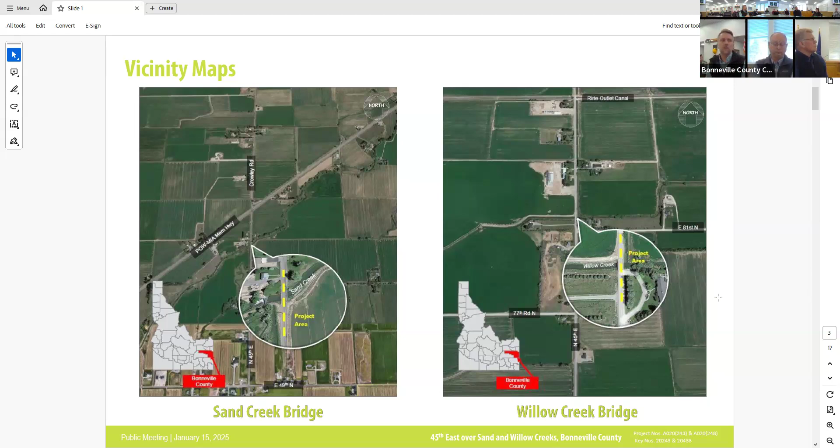The project is funded by federal aid, but our goal is to make improvements to the bridge. It's not a roadway project, it's not extending 2 miles of roadway improvements - it's strictly to replace the bridge. If we go to the next slide.

A little background on these two bridges, and I have some pictures that will follow this, on why they're being replaced or what the need for them is. Both of them have approached their service life. Sand Creek is a little older, built in '57. Willow Creek was built in '69.

Sand Creek - if you go there right now, there's no water. Well, I don't think there's water in it right now, but you can walk underneath the bridge and you can see the condition that it's in, and it's not in very good condition. Both bridges are posted, meaning they're weight restricted, and considering the area, that can affect farm equipment and other heavy traffic vehicles.

So the county identified this project, I don't know, 5 or 6 years ago, submitted an application to LHTAC for funding, received funding, and went out for proposal.

This federal aid process takes a lot longer than some of the other bridges we're working with on Little B, which will have 5 or 6 bridges. Little B is the new commissioners' Leading Idaho Local Bridges program, funded by the governor 3 years ago. We were able to apply for a number of bridges in the first round of funding, and they came out with a new round that we just applied for, the maximum number of bridges, which was 2. We haven't heard back on that yet. That's separate from the funding for these bridges. If you have an expectation that process goes as fast as that, it doesn't - with federal aid it's a much longer process. We'll talk a little about timelines, but it does take a while to go through everything.

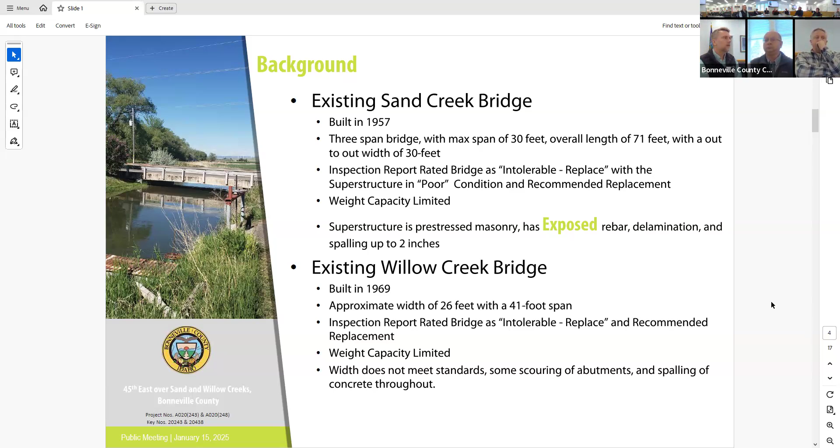If you go to the next slide, you'll see pictures of the underneath side of the bridge. You'll see cracking longitudinally - those are actually masonry blocks, which is a unique style of bridge. You don't see that very often, but it's masonry blocks placed together and then post-tensioned, with tensioning strands in there that tighten it up to keep that together. So there are cracks, you're seeing efflorescence, which is moisture coming through the blocks, and you're seeing the piles being eroded. So it's not only load posted, but it is in need of replacement before something continues to get worse.

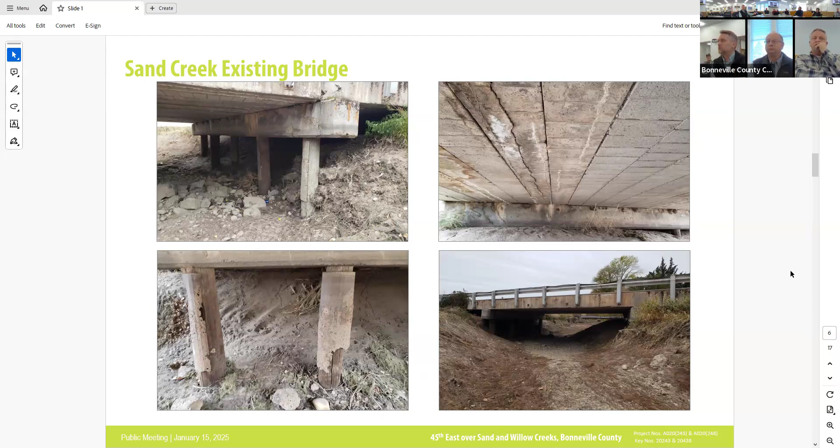So that's Sandcreek. Willow Creek is a steel bridge - the girders are in a little better condition, but it is still load posted, and there is some scouring effect as that water runs pretty much year round.

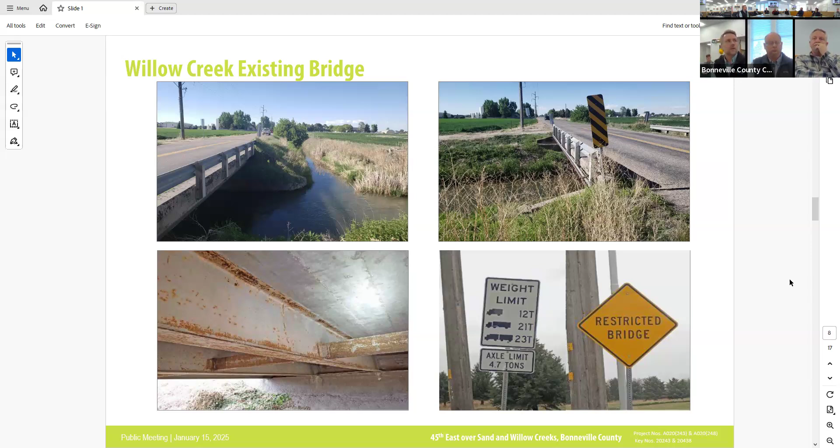So we already talked a little about the objective and some of the elements, but the objective is mainly to replace these structures with new, wider, longer structures that improve safety for vehicular and pedestrian traffic.

Project elements: both bridges will be new. There will be realignment - I'll show a little of the preliminary plans here - but that Farmers Canal adjacent to the road ties into Willow Creek, and we're going to have to realign that a little to get a wider road and wider bridge. We've had preliminary discussions with the property owner as well as the irrigation district, and as we continue forward in design we'll have further conversations with them. But we'll have to realign that a bit to get a proper width of the bridge.

We'll have guardrail on each bridge. The bridge will be closed during construction, and we'll provide detours for both. Residents will still have access to their property during that time - that's the goal, to maintain access, but they may have to go around on a detour.

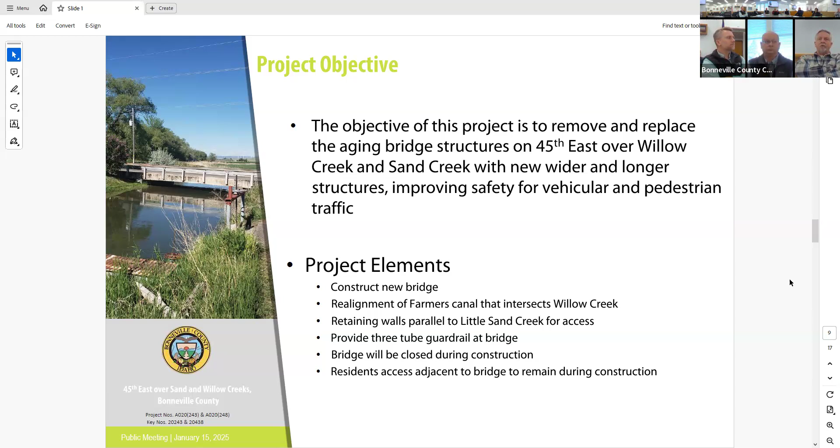So the project cost for this - again, this is federal aid, and federal aid tends to be more expensive than if the county were just to do the project themselves.

Even the little B process is a little more expensive, but the funding for this is primarily funded through the off-system bridge program or the on-system bridge program. Looking at Willow Creek, we have a construction estimate right now of around 1.9 million, Sandcreek around 2.5. Total funding for this is going to come from about 4 million from the on-system bridge program, a grant that the county applied for and will receive, and then Bonneville County has a 7.34% match, which equates to about 323,000.

These numbers will likely fluctuate as we get closer and dial in some more needs, as we meet with others and see what we need to incorporate. But those are preliminary numbers.

We are in the process of environmental clearances right now. One of the purposes of this meeting is for environmental clearances, to provide a public forum for people to weigh in, for commissioners and others to provide comment if they have comment, but mainly to notify as part of the environmental process. We are making progress on that, and once we reach environmental clearances, we can then proceed to final design.

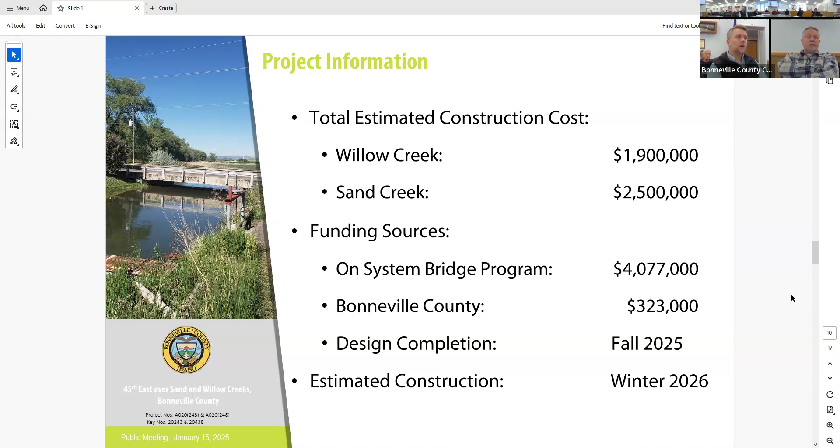Again, federal aid does take longer. There's longer review times, it's got to take a process there, and so that may change, but that's what we're hoping for. We still have other things to work through certainly, and some of those are working with property owners. Some of them are here today to make sure they're on the same page as us.

So on Sandcreek, that gives an idea of the bridge with guardrail on it, the width of the bridge. The width of the bridge is 52 feet out to out. This allows for, on Sandcreek, a future third lane or turning lane that may come in the next 10 years. Not sure, but I know in coordination with the highway, possibly having a center turn lane going north of that, it allows for that.

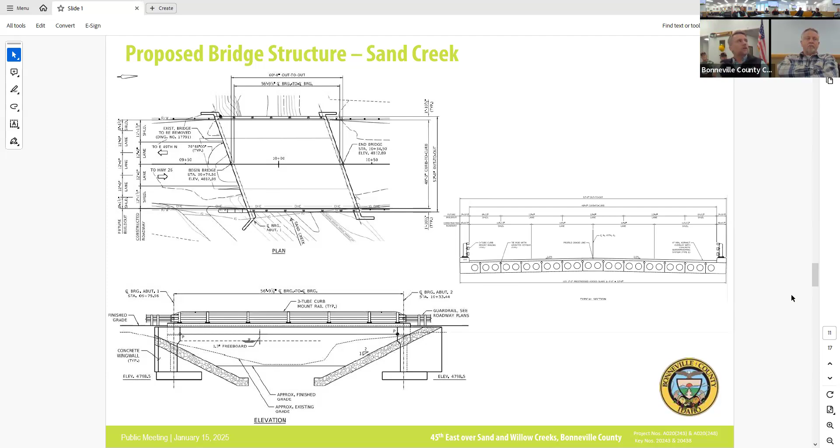And so the road is much wider there, and then it will neck down. If you go to the next slide, it will neck down to the existing road. The goal that we are trying to do with both of these bridges is stay within the right of way.

In this instance, some of the wing walls may extend outside the right of way, may extend into the irrigation district's right of way, and into some of the property owners' land. We've had some preliminary discussions with the ones on the northeast and southeast property owners and how that may impact them. We intend to have further discussions with them as we continue to progress.

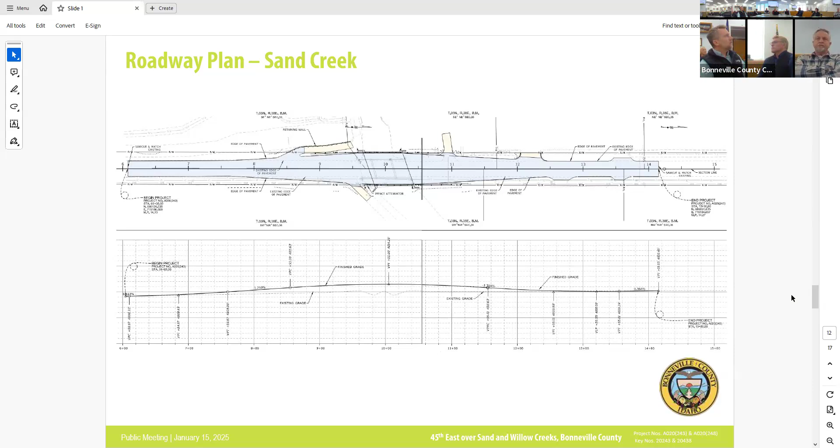If you go to Willow Creek, similar thing, but we are not widening the road substantially. We're not adding a third lane. This is 2 12-foot lanes with 6-foot shoulders, which is more in line with what AASHTO and the state would like to see, with a 40-foot out-to-out bridge with wing walls and some guardrail on the approaches.

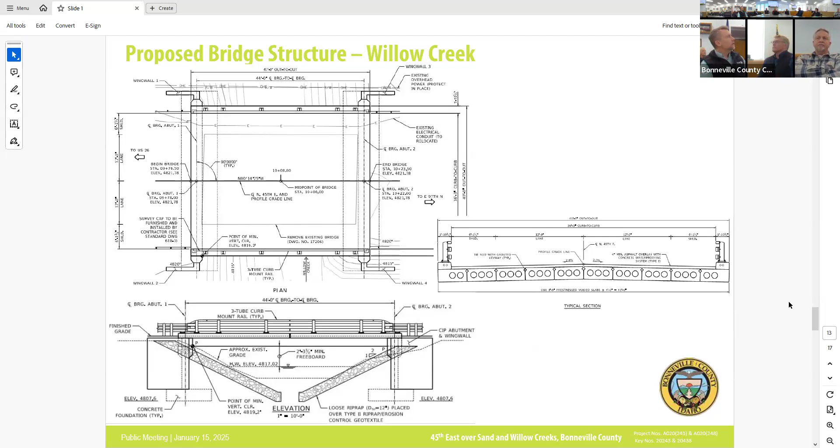If you go to the next sheet, again showing the profile here, the profile on this one pretty much maintains the existing profile, not raising it a whole lot. We don't have hydraulic clearances there. But if you look at the northeast property, which is where it shows the Farmers Canal, that's where we're going to have to realign it, because right now it goes adjacent to the abutment. So we're working with the irrigation district and property owners on that to make sure everyone's on the same page there.

Roadway elements all stay within the right of way, but we do have some property accesses that we're going to be working with the property owners on to make sure it's graded properly and that they maintain their access. And we do have one on this one that we're going to have to get rid of. It's just way too close to the existing bridge, way too close to the new bridge to be able to have somebody continue to use it.

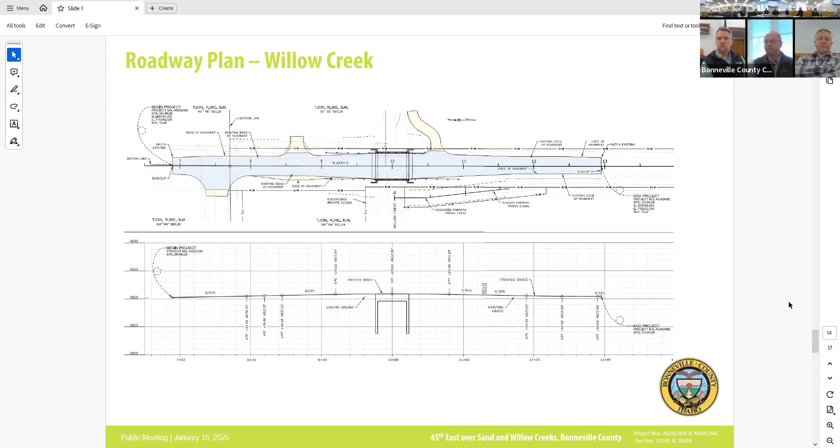The access right now would be cut in half with where the new bridge is going. We've already talked with that landowner about it, but that access is going to have to go away. We'll still have the main access. If you're familiar with that site, it's sort of a horseshoe driveway on the south side that comes in and goes out on the north side, right at the bridge. That's what Lance is referring to, it's too close for the existing bridge, but with the new bridge being a little longer and wider, that access can't be maintained. So we'll still have access to his property in the future, we'll just have to work with him about some adjustments there.

Detour routes for these projects may go on at a similar time, or they may not - it all depends on funding and environmental clearances. Right now, if these were to act independently, you'd close 45th East at Sand Creek, and that would be your detour around if you needed to get somewhere. Pretty simple detour, accessible. It's inconvenient, but by closing the road at one time and completing the bridge all at once, it probably cuts the construction time in half. If we tried to leave it open, the time frame doubles and likely won't meet the irrigation season window. So by closing the road, which is the same for Willow Creek, we can get it done a lot faster - the contractor can just move and go, shortening the impact on the public.

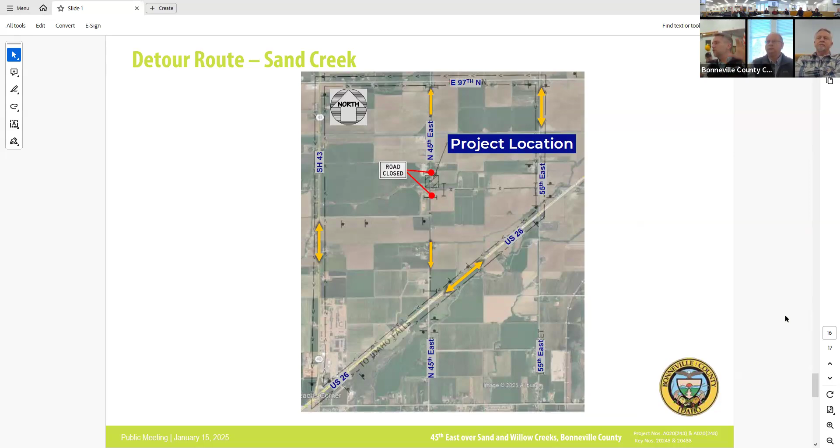Sand Creek - oh sorry, there's Willow Creek, I should change that, that's Willow Creek - but again, same thing there. North detour to 97th, south is US 26, basically going around. You're going to have a couple mile detour on this one. There are other roads there, but those wouldn't be accessible - they're maybe farm access roads, gravel, or private roads. So we try to detour the traffic to the main roads that are county maintained.

So that's the overall aesthetics and concept of the bridge and the background of the project. Open to any questions or comments you guys have, and anything else you may want to talk about on this.

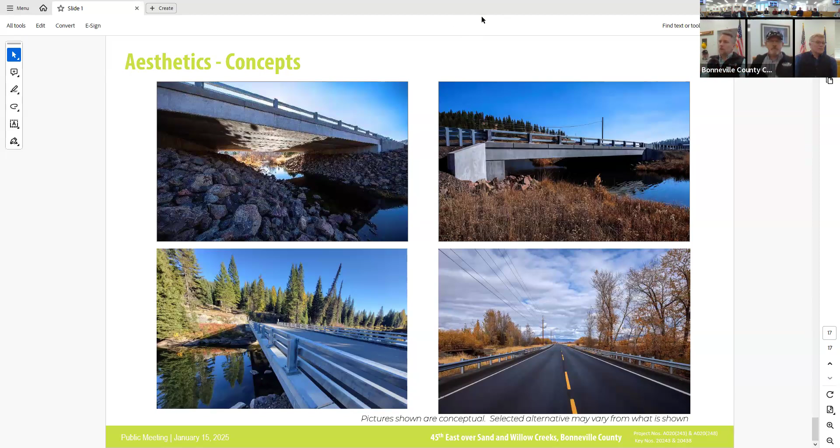I don't know if with this setting it's appropriate to see if there's comments from the public. No, this is a public meeting for public input. Okay, that's how it was listed. So it's appropriate to leave comment forms. Yes, absolutely.

And if you have comments, if you're here and you have comments on this, or you'd like to provide input, please take the form. I can promise you that those are scrutinized and will be responded to.

I've seen that work really well in the last couple of road projects, and because of the input, projects changed. So as public, we need to be aware that the public's voice is heard. It's not just ignored.

One of the primary focuses is an update. Our intent, we've met with a number of them personally already, is to continue that process going forward with individuals that have certain concerns, especially property owners that have impacts. The southeast corner on Willow Creek is substantial, still within the right of way, but it does affect it. The southwest corner on Sand Creek and the northwest corner on Sand Creek, their approaches are affected. We want to make sure I plan on meeting with them again individually, get project input, make sure everyone's on the same page before this goes out to construction.

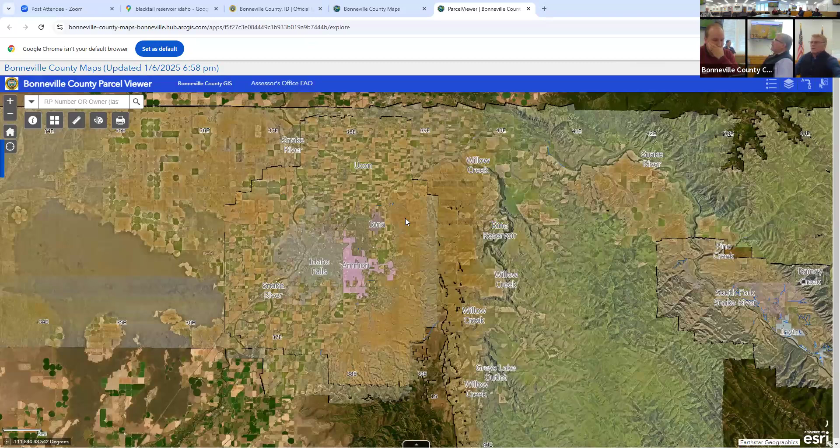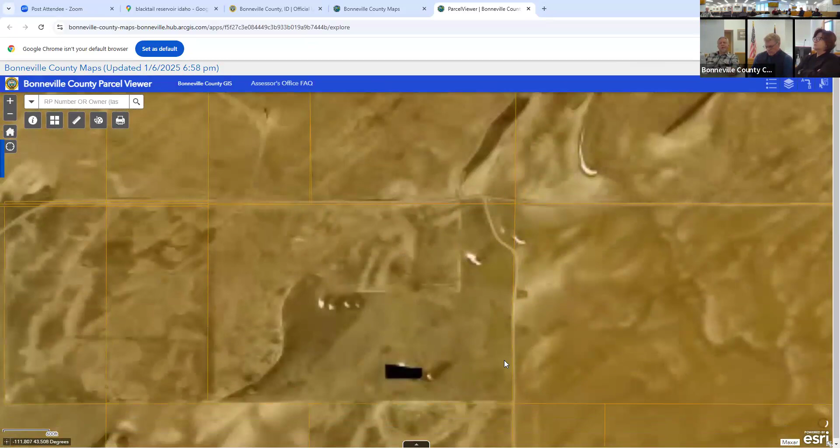It's owned by Johnson's, I thought so. Is it productive? The Johnsons aren't farming it, it's being farmed by someone else, not running their own farm now. What Johnson's are we talking about? It was Bud Johnson, and now it's his sons, Robert and another, they lease it out. Gary and Robert, no, different Johnsons.

Do you remember who the, what was their name? I can't, it's in the trust, so it doesn't show the names. Johnson Family Limited Partnership. I can see them, but I can't remember their name right now.

They are not interested in having any ground sold to Fish and Game. They've already made that abundantly clear.

Would they consider a long-term lease to Bonneville County? They're not even very happy with Bonneville County. Well, send Wes up there, let him handle it, he knows. What do they think the solution is?